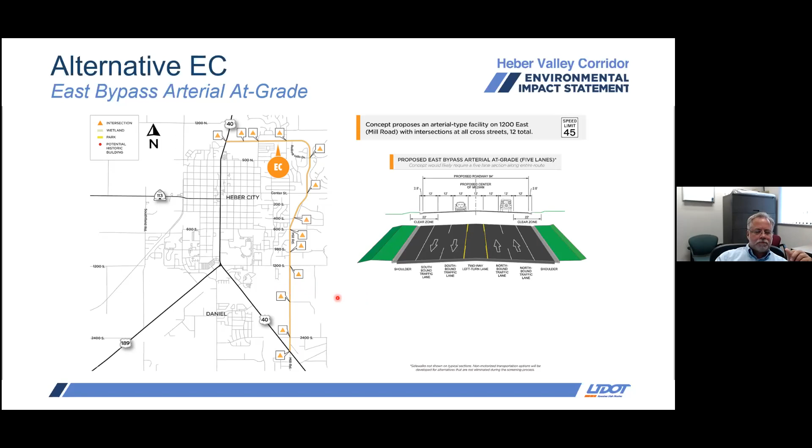It requires more lanes than the previous two alternatives because this alternative carries both the local traffic as well as the through traffic, which in the other two alternatives were split. So with that, that does get us through all the east alternatives.

The last alternative to look at is our transit alternative. Just by way of background, a transit study was prepared in 2020 to develop a vision and an implementation plan for public transportation in the Wasatch County area, to address many of the unmet needs there.

Some of the recommendations from that study: first, provide local service within the Heber Valley. Another recommendation was to create a commuter route between Park City and Heber. Another alternative was to create a commuter route between Wasatch County and Utah County. And then there was a recommendation to create van pool services from Heber City to Orem and to Park City.

Our transit alternative concepts are based on these recommendations. So with that, that does get us through all the alternatives we are currently considering with the EIS study. Hopefully that was informative, I'm sure you have a lot of comments.

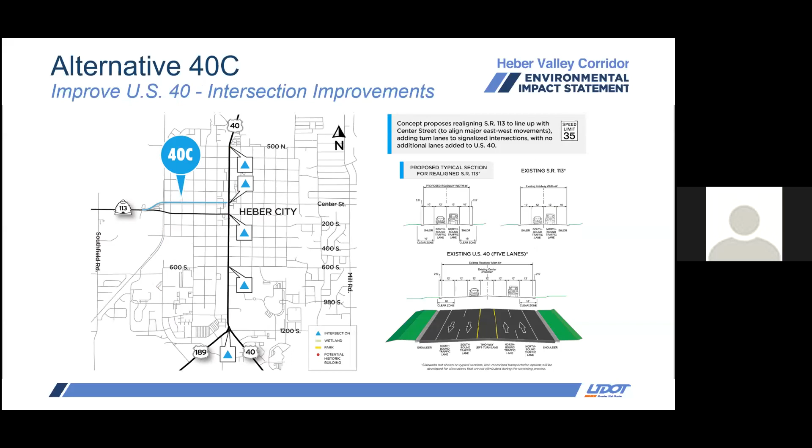So the initial cost estimates I saw were at least $400 million. Is that not accurate? Honestly, we don't know. I'm not sure how those costs were evaluated. Let me go back to trying to scroll back here. Well, I think that would be a really important aspect of the EIS. If we're talking $400 million for a Western bypass and an Eastern bypass, I think these are numbers we should be aware of. Absolutely.

Wouldn't you? Yeah. And then the next question I had was, what is actually the no-build minute delay from like 700 North to 1200 South of Heber Main Street? If I remember looking at your data, it was maybe 8 to 10 minutes for a no-build delay. Is that correct?

I'm going to kind of punt that question over to Charles, our traffic manager, to answer that a little more directly. I do want to circle back on Justin's previous question about costs. We will have developed cost estimates once we get into the detailed alternative analysis.

Well, you see my concern here. I mean, if it's $100 million per minute delay, that's just absurd. Wouldn't you agree? I mean, if it's an 8-minute delay from 700 North to 1200 South, and we build an $800 million bypass, it makes zero sense for the taxpayers.

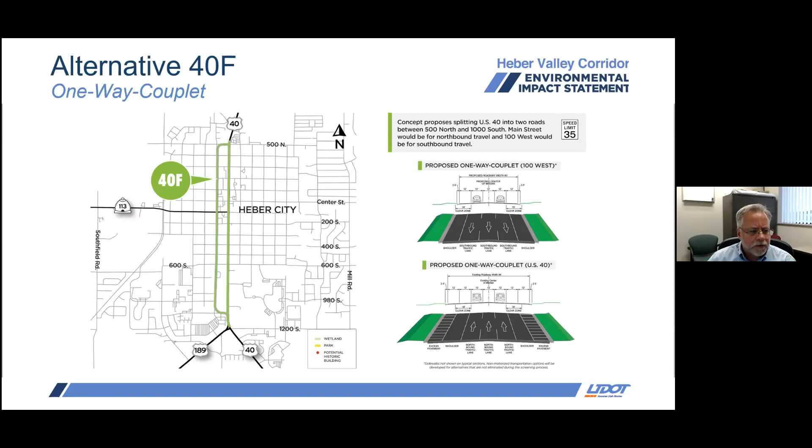So I'm trying to get to the right screen here, bear with me a minute. So with each of these alternatives that we're proposing for the west bypass, let me make sure I'm understanding your question right. We have two options that go with those. One of them would keep US 189 in its current configuration. The second option would realign US 189 onto the bypass. So we're looking at both of those different options.

Okay, that's fine, the westbound alternatives are fine. But if you go to eastbound, you'll notice that all the eastbound alternatives are coming off of 40, and we're not addressing traffic coming north on 189 with all of the eastbound bypass. Yeah, yeah, and Craig, you could answer that. Yeah, go ahead, Vince. Yeah, I understand his question now, but go ahead. Vince, so yes, you're correct. And that's part of what we'll be looking at in the screening process, is how well either the west, east, or middle US 40 alternatives meet the purpose and need criteria.

So those are things that will be considered when we do the travel demand modeling and how it impacts traffic, and what traffic uses a route. So those are things that we'll be considering.

Okay, thank you so much. Those were my questions. You've given me answers.

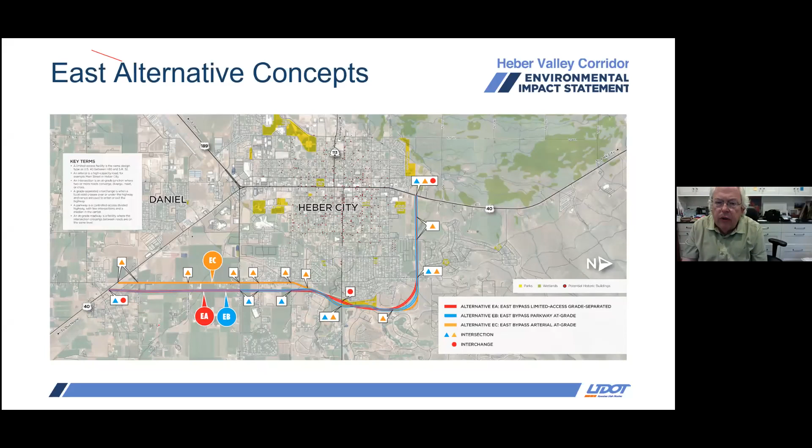One is, how did the Western routes arise? It was my understanding that for many years, a route that was meant to bypass Heber City and would begin just north of 500 north in Heber, the options A, B, and C, that those were being planned. And then now suddenly we have D. How did D come about? Who was pushing that? Where did it come from? That's my first question, because all of these, I'm assuming, the ones that were planned for a long time, governmental agencies may have been acquiring land for those, right?

Right, so that to enable that bypass. But D is brand new. It would require acquiring a lot of land through the North Fields. And that brings me to my second question. You're aware that the North Fields has received a lot of attention, including a referendum, to protect it. What types of considerations, environmental and otherwise, would you give for running a highway right through the North Fields?

I'll attempt to answer your first question, Trudy, and then maybe I'll turn the second question over to Naomi or Vince or Andrea to answer.

To your first question, part of our public process last spring was to ask the public if there were any other alternatives that we needed to consider as part of our alternative analysis. The WD alternative did come forward as one of those alternatives from the public, and so we felt like it was important to incorporate that in and consider it right along with the other alternatives that we're considering here. So it came from a member of the public.

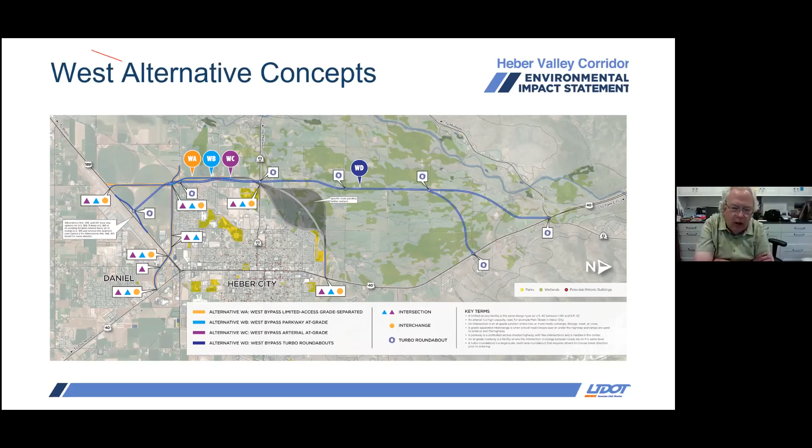Does that answer your question? I have lots of questions. We could go on, but I want to give other people a chance to ask. Thank you very much for your answers. I appreciate it. Thanks, Trudy, for your patience. If we have time, we can circle back to you.

On the written side of things, I want to throw out a second comment related to the one I read earlier about East A being a fast option. Western D might be the best fit given a different circumstance, but others seem short-sighted. That's a verbatim comment as well.

We did have a question come in on the chat, I'm just going to read it out: Is it possible to do concept pictures of what a bridge or tunnel would look like on Highway 40, so the public can actually picture what Main Street and downtown would look like with both alternatives? The slide doesn't show a visual of what the option might entail.

Yeah, that's a good question. Maybe Andrea, you can chime in on this, but it seems like we've done these kinds of visualizations in the past. Yeah, I'd be happy to.

As I mentioned in the last answer to a question Trudy raised, for the alternatives that pass through the screening process, there may be a handful that we look at in detail. Visual impacts is something we will be considering for those alternatives that pass through screening. So if by chance a bridge concept is one of those, we would certainly develop a visual simulation to show what it would look like. If it doesn't make it through the screening process, we will not do a visual rendering because it will be eliminated before we look at it in detail.

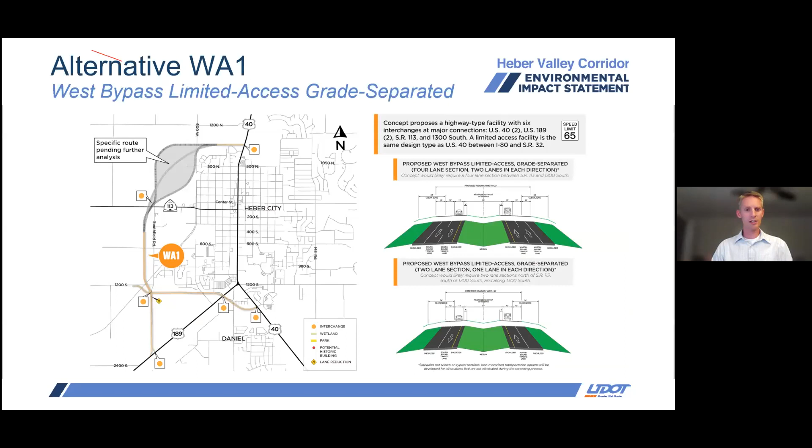It sounds like the question is, we have some alternatives where there's an option to realign a portion of US 189 as shown on this diagram, and what sort of benefits we're seeing. First of all, the analysis so far is very preliminary, but results we've looked at and from previous studies suggest that creating a realignment like this may pull additional traffic off of Main Street, providing additional relief to congestion. How much exactly that is, is something we're going to take a closer look at as the study moves on, and see if it's enough of a difference from other alternatives that it provides a significant benefit to Main Street.

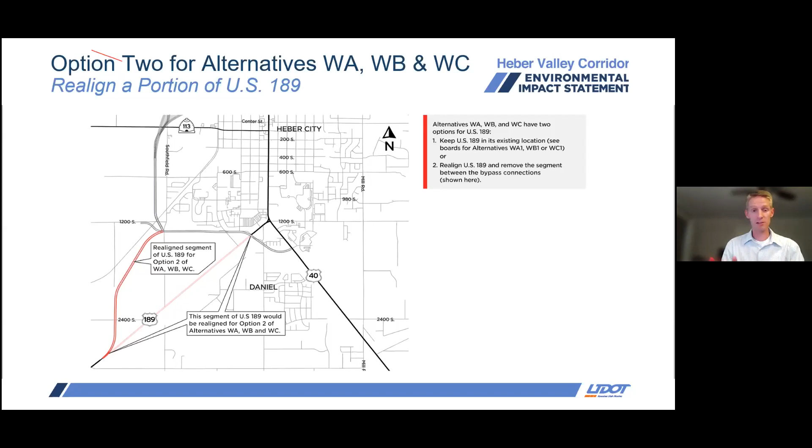Yeah, so I think when you mean west or east, I'm guessing you mean either coming from 189 or coming from US 40 from the Daniels Canyon area. The answer is, when we're talking about through traffic on Main Street, there is more total traffic coming from 189, but there's more trucks that come from 40. So those overall patterns are something we are definitely going to be looking at, seeing how effective the west bypasses versus the east bypasses are at relieving congestion on Main Street.

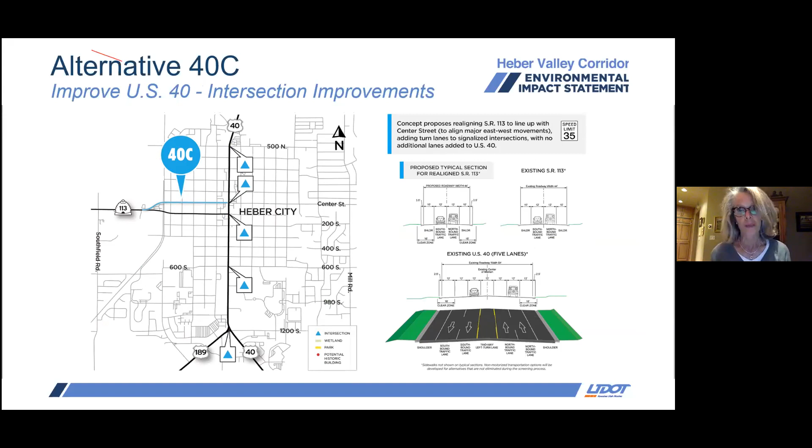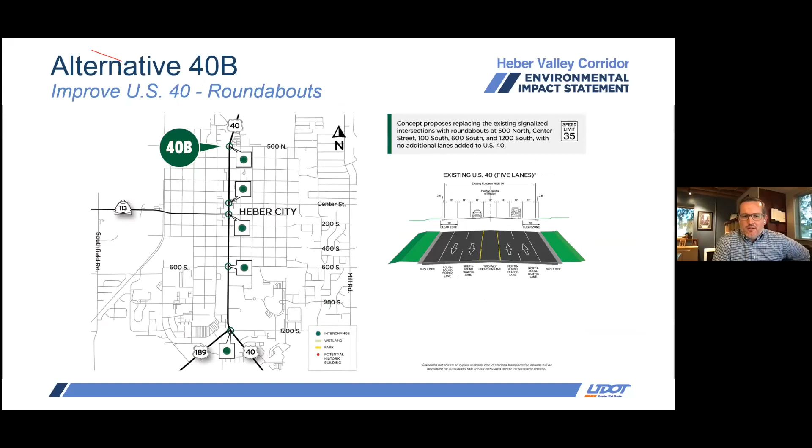But thanks, Sue Ellen, we appreciate your comment. Make sure we capture that in a formal comment. Anyone have a response they'd like to make? No, I would just add to that, Justin. That's a great comment, Sue Ellen, please send those comments to us so we can capture them. I will, and I just have one last thing.

I was kind of curious - you said WD came from a member of the public. Were there numerous members of the public with that idea of starting the bypass at River Road, or was it just one person? I know I made a lot of comments and suggestions that haven't entered into any of these proposals, but maybe there were several people proposing the WD idea, or was it just one?

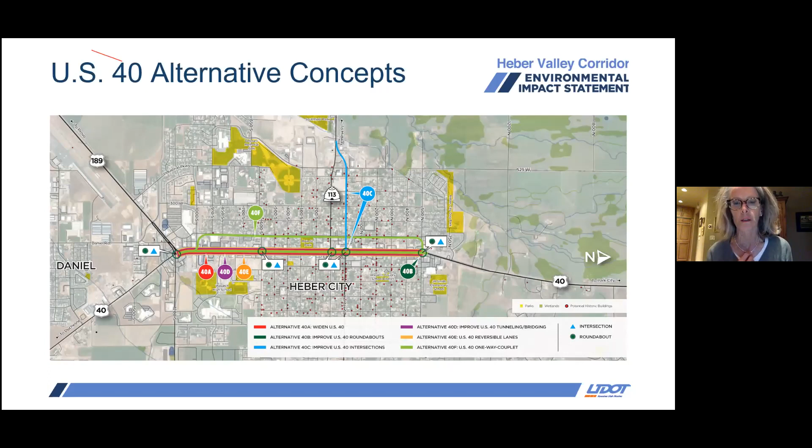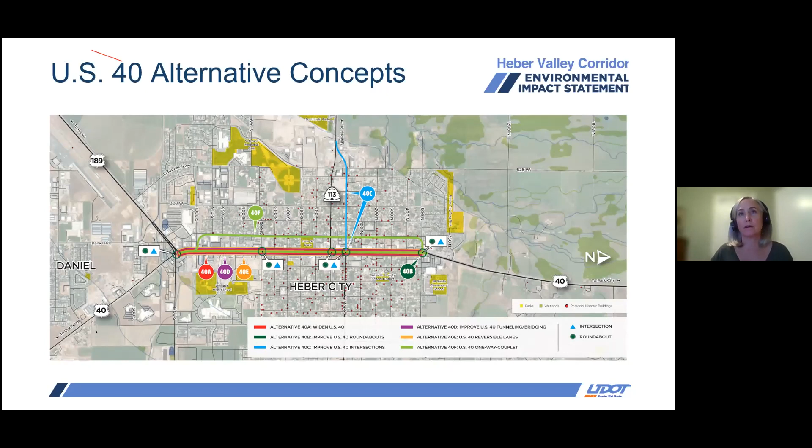I don't know, maybe Andrew you can speak to that. I know it came as one fully developed alternative. I'm not sure how many people, if it was one person representing a group. But it was a fully developed alternative that came forward. And I'll add to that - it was a fully developed alternative, and there were a few people who commented that they were in support of this alternative as well.

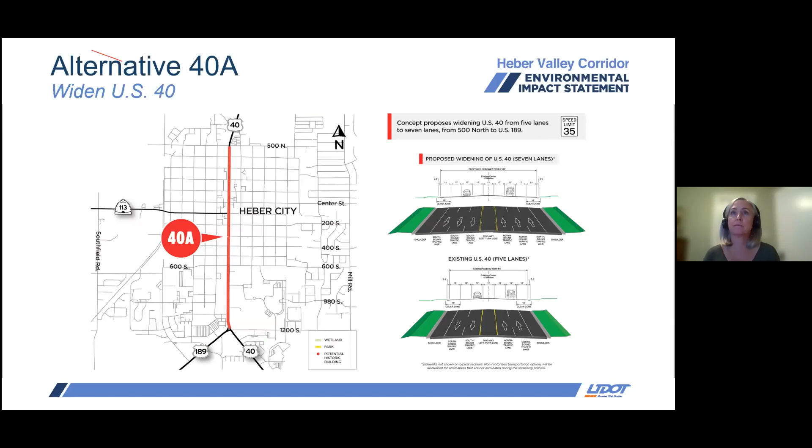And then Sue Ellen, to your comment that you submitted some ideas on alternatives you aren't seeing here today - we did try to get all of the alternative suggestions from the public into these concepts. But if you feel we've missed something, whether you commented before or not, we would like to hear about ideas we could add to our toolbox, to make sure before we go into the screening process that we've got all the reasonable alternatives to begin with. So apologies if we missed something you submitted before, please submit it again.

Okay, so we're going to go back over to the written comments or written questions. We received a question from Brady Flagare. He says, is there anywhere else similar to Heber Valley where turbo roundabouts are used? I like the concept, but they seem impractical for towing trucks in this climate, with snow.

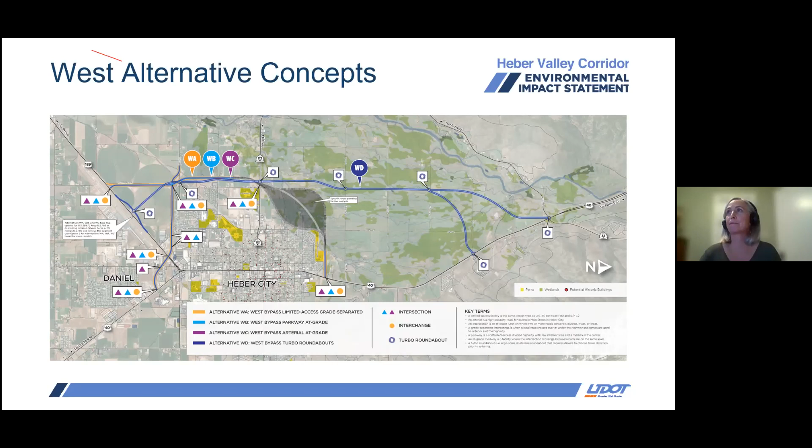I believe we do have some links to a website that FHWA has produced, and also another website from the creator of this one as well. Can we post those links on our website, Andrea, so people can see that? We're not aware of any turbo roundabouts locally or in the Utah area, but I thought these links did a nice job explaining what turbo roundabouts are and where they're being used. I think they're used a lot in Europe, but I'm not sure if there's any being used anywhere else in the U.S.

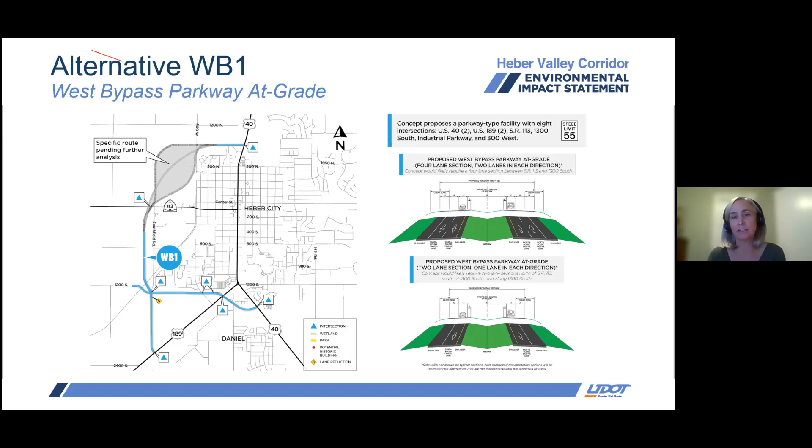This is Andrea, I can add just a little bit. I think different people have different definitions of what a parkway is, and I don't know that there's one right answer to that. But it is a good comment on the number of intersections -- that's something we'll be looking at through traffic analysis. I did want to call out that WC is an arterial at grade. It has a different cross section, but we have an alternative that's pretty close to WB, slightly different without the median and with I believe just one more intersection. Bob, I just wanted to clarify, you said D as in dog, correct?

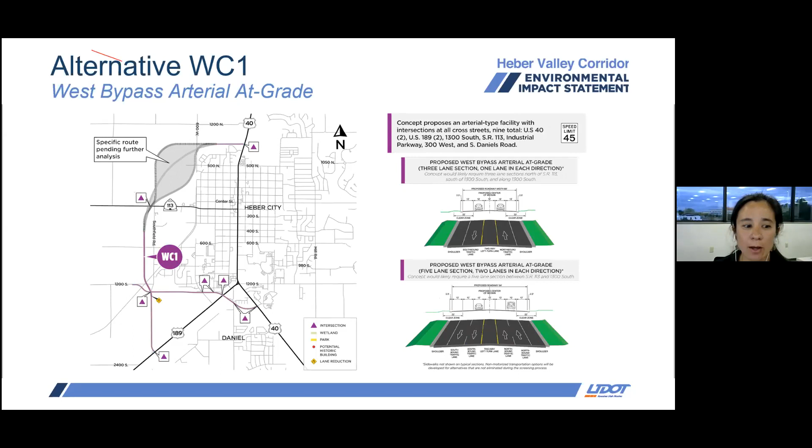So you were talking about the turbo roundabout alternative -- D as in dog is a true parkway based on your key terms. I compared the key terms with WB as in boy, and really it's not a parkway, it's more like a bypass arterial, more like a main street, because you've got all the intersections coming across it. It's not a biggie, I mean, it's just something that if you change the terminology, you won't look at it as a high-speed parkway -- you'll look at it as a slow-speed main street.

I just want to clarify, Bob, the speed we have on the WD alternative is also a 55 mile an hour speed limit as we show it here, and it does have a number of at-grade intersections where those turbo roundabouts are being utilized. And then if we go back to the WB alternative, it similarly has a similar speed of 55 mile an hour, and I think it has a similar number of intersections as well. So I think we're fairly consistent there, but we'll definitely take a look at it and make sure we are consistent in that terminology.

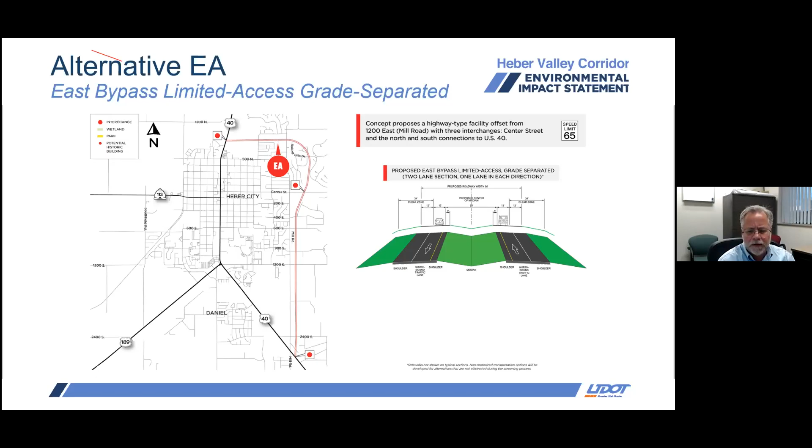There would be connections at the interchanges at 3 locations: one at US 40, one up at Center Street, and another on the north end of US 40. So the local road network would not have direct access to this alternative; rather it would bypass those local roads. Traffic would be coming off of Highway 40 closer to Daniels Canyon, but it wouldn't have any of the traffic from 189. Is that right? Yes, as we're showing it here, that's correct.

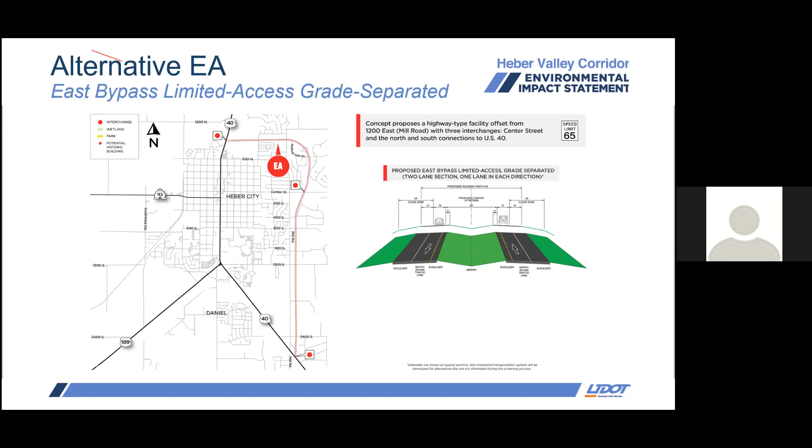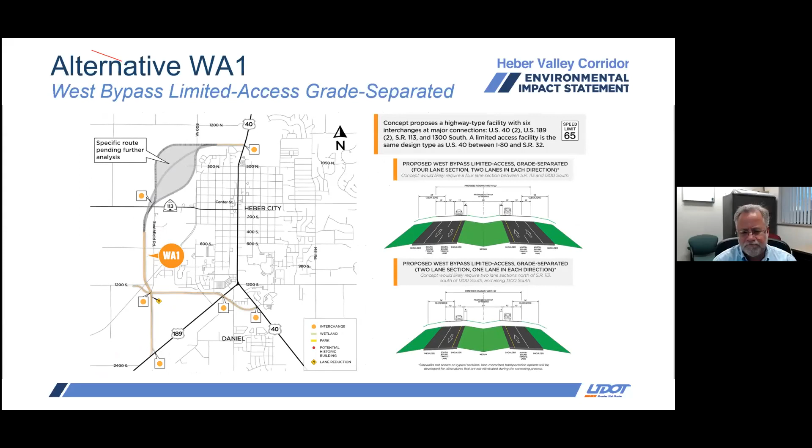Okay, and then with the westbound—is it the same kind of thing, I think it was westbound A or W, or 40A? That one is the 65 mile an hour option. Is it the same idea where it would either go above, over intersections, or under? Yes. Very similar idea.

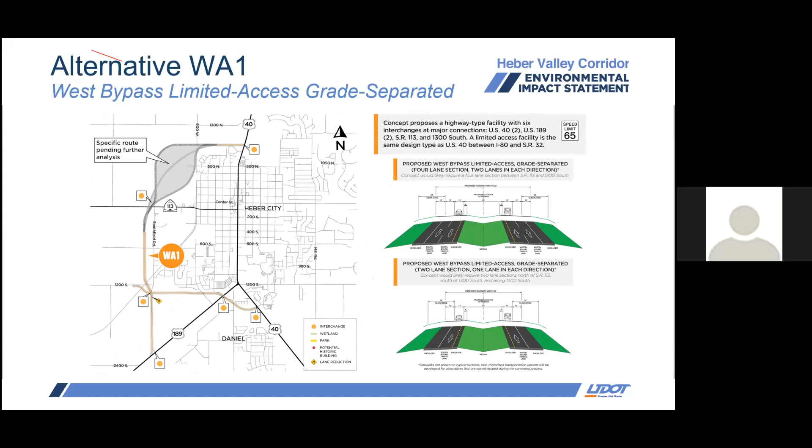And with this process, I saw on your timeline there's going to be a further ability for public comment when you get further in, I think in the summer of 2022. Does that mean changes could be made then when you narrow things down more? Would we be able to have even more of a say in what happens?

Maybe I'll turn that over to Naomi to discuss the public process as we move further into this. Sure—after this, we'll go back to work essentially further developing the alternatives, following that screening process with the kind of funnel diagram. Those alternatives that make it through level 1 screening, meaning they meet the purpose and need of the project, and also make it through level 2 screening for critical resources, we will analyze in detail, and the draft EIS will show the results of that analysis.

In that draft EIS, we will also identify our preferred alternative. The public will have an opportunity to comment on the draft EIS in general, our analysis, and the preferred alternative or anything else contained in that document. It will include a summary of all activities done, the alternatives that were dismissed and why, and the detailed analysis of the ones carried forward. Does that answer your question?

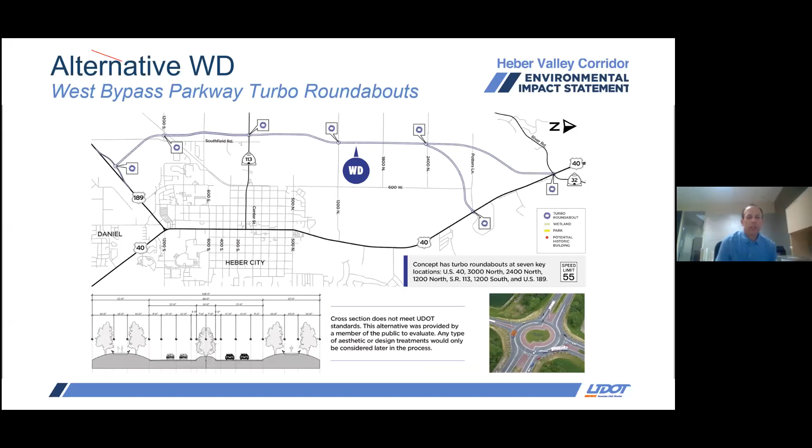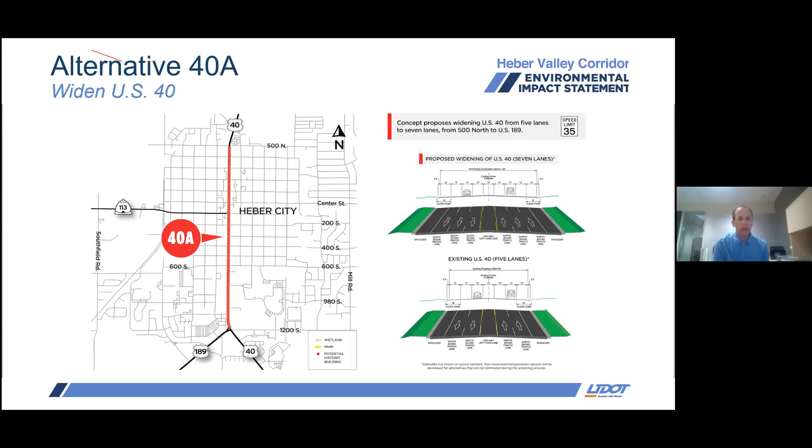Get back to that. I can answer that, Craig, if you want. Yeah, why don't you go ahead and fill that one, Vince. Thanks. I think right now at this phase, we're just looking at whether the tunnel concept works in alleviating traffic, and is it a viable or reasonable alternative. If it does pass screening, the next part would be to look exactly where we would place the alternative. We put it on Main Street - it's just the best place right now, but we could look at options to maybe put the tunnel in a slightly different location. Since it's underground, the construction impacts are very minimal. They construct subway tunnels all over the world, under buildings, under streets, that are fully operational, and there's no impact. So I don't know that we're concerned about that. It's just to see if the alternative works. And that was the place just to put the alignment - we could look at different locations.

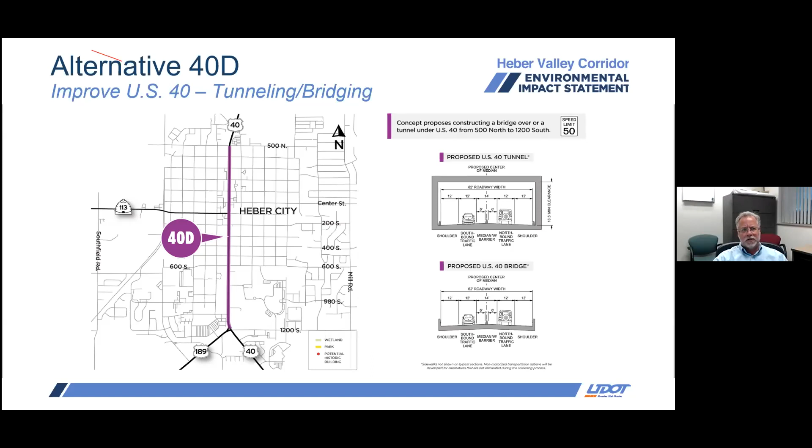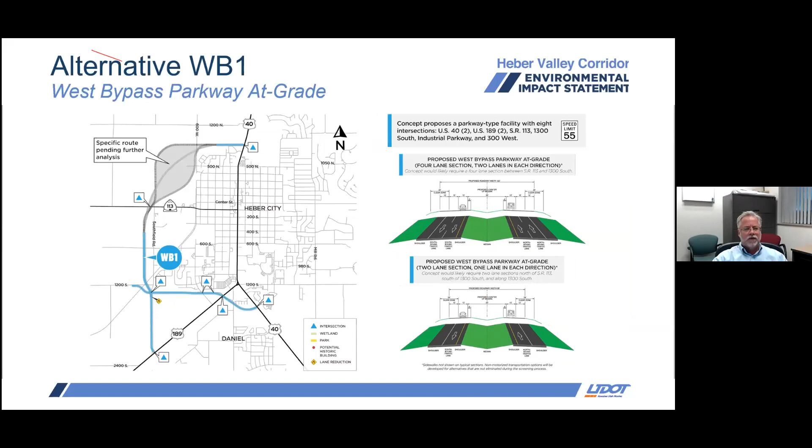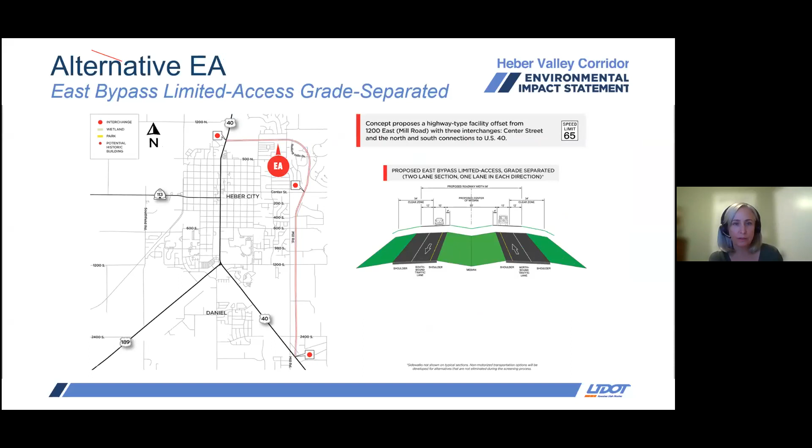So if you want to scroll to one of the slides that shows the scroll plots, I think any of those would work. That one, yep, that's helpful. It's hard to tell on this screen, but if you went to the website and the alternatives tab, you could go to a section that shows the scroll plots. If you clicked on any one of those—US 40, West Alternative, or East Alternative—you could zoom in and look at it in more detail.

The red dots shown on that scroll plot are hard to see on this screen, but they're there, and they represent preliminarily what we've identified as potential historic buildings. You can zoom in there and get an idea of how many we think there are at this point. But I want to put in the caveat that it's preliminary information we have from available databases, like the State Historic Preservation Office, that we've acquired and are showing here.

So we'll use this data for screening, and after we go through the screening process, we'll go to more effort to identify which buildings meet the criteria for eligibility on the National Register of Historic Places. So these dots signify a starting point. We still have more work to do, which we'll do after the screening process when we narrow down the alternatives a little bit more.

Yeah, it would be interesting to see how many hundreds of millions of dollars we have to pay for two blocks, essentially, of historic Main Street.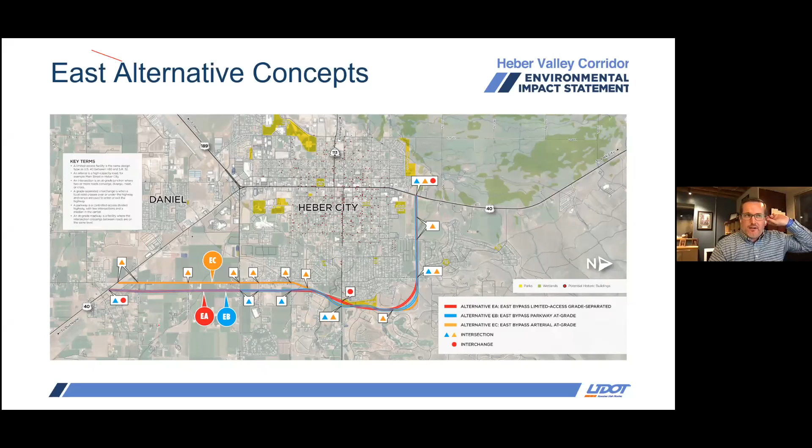We have one more question submitted by Brian Fletcher. He asked earlier about the tunnel, and in response said: Thank you, I see the tunnel as a win-win. There is minimal impact on traffic during construction, no neighborhood disruptions, few to no intersections needed, reduces noise pollution in the valley, can reduce air pollution through air filtration in the tunnel, and increases safety for pedestrians and bikers on existing roads. So just a follow-up statement to the answer received. Thanks, Brian.

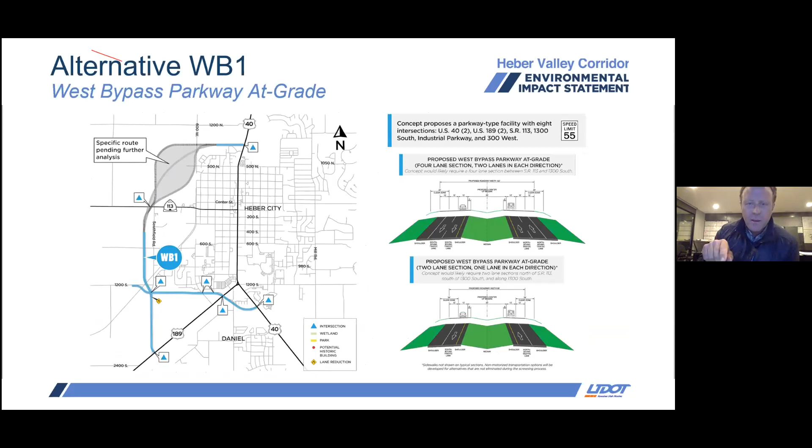I have a question on the western bypass. You may have covered this, I apologize, I haven't been on the whole night, but there's the one that starts up at the intersection north of town, the WD alternative. Why is there two?

Are the two options the one that comes off of Potter Lane and then also the one that comes out of River Road? Is it one or the other, or is that both? No, this alternative has both of those connections being made. So it's not one or the other. This alternative would go with both of those connections, the one at Potter Lane and the one at River Road. Is there some reasoning as to why you'd have two funneling to the same route?

This was an alternative that we received from a member of the public. We haven't really evaluated it based on the traffic. If this one passes through some of that screening, we'll take a look at it and see, at least from a traffic perspective, whether or not both connections are needed or just one. So at this point, we haven't really evaluated it from a traffic perspective.

And is the turbo roundabout only offered in this route? Is this something that also came from whoever the person was from the public that brought this up? Yes, it came specifically as part of that alternative. Have they been used anywhere else in Utah? I'm not aware of them being used anywhere else in Utah.

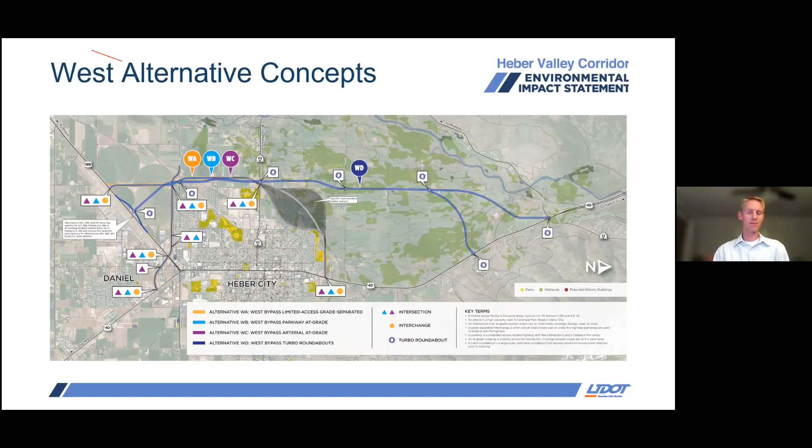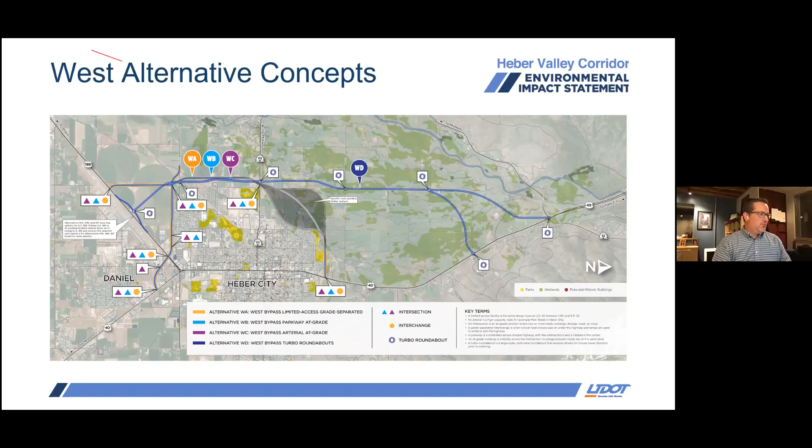Do you mind if I ask one more question? Is anyone else waiting? Not at the moment. Please continue. On the eastern side, is part of the study looking at the positive benefit of that side alleviating so much of the growth that right now is funneled to Center Street and 12th South?

I mean, we have the bypass option obviously for traffic coming through the valley, but does the study also take into account the traffic that's coming from the east side, from Timber Lakes, from Lake Creek Farms? Is all that weighed into that?

I mean, clearly that's part of the traffic, or is the bypass just considering the tankers and the traffic that's coming from either North 40 or Highway 40? I guess Highway 189 doesn't really impact much, but...

So the eastern bypass does consider both the through traffic and the local traffic in these alternatives. Charles, I don't know if there's more you'd want to add to that, but it does look at all the traffic in that area.

Yeah, the way these alternatives are defined right now is they're open to any vehicle that wants to drive on them. And in our traffic modeling, we're taking into account the travel patterns for the entire valley, so we're investigating how much they would be used by any type of trip within the valley. So it could be assumed that there's kind of a double bonus to the east side scenario.

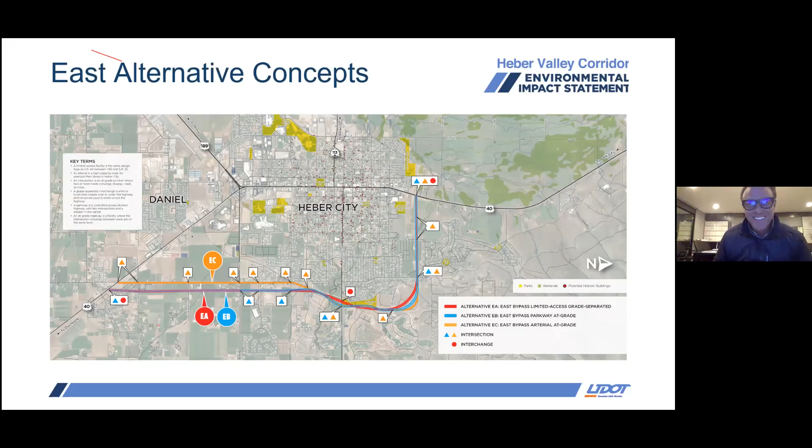Maybe while we've got a minute, I'll throw the opportunity open to our project team, our study team. Any additional clarifications, comments, anything that I've missed in moderating that we want to remind folks of? I see Andrea came off mute, maybe chime in.

I do have one. I've heard a couple of comments about people saying, well, when's a bypass going to be, how long is it going to take? I just want to remind everybody that we don't know that it will be a bypass at this point. We're looking at alternatives that could be a bypass, or alternatives that could improve US 40, but we really don't know at this point. I just wanted to make that comment.

Good reminder, thanks Andrea. Geoff, you see you came off mute also.

Just want to remind those in attendance, and those who may be listening to this or watching this after the fact, that this will be posted online - the entire meeting, as well as the presentation itself. So if you miss something, you'll have plenty of time to go back and review. We want to make sure everybody has as much opportunity as they can to take advantage of the information provided tonight, that'll be provided tomorrow, as well as throughout the comment period. Once this is posted, we'll keep it up throughout that comment period, and most likely throughout the project until we get to the point where we move into the draft environmental phase, when we get back out to the public as we go through this refining process.

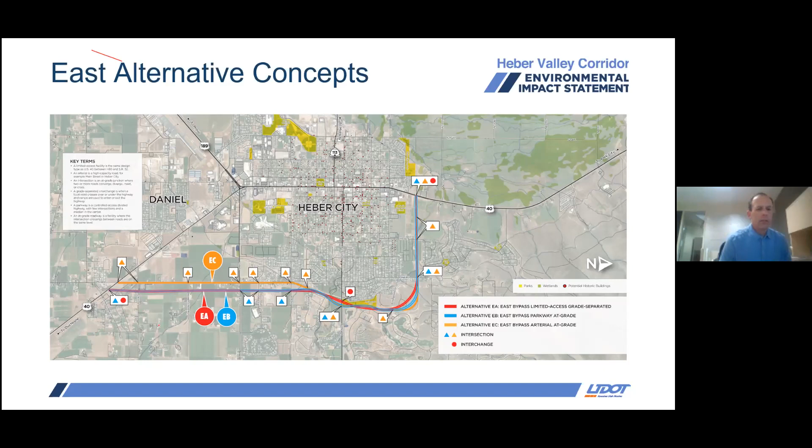I want to add that the project to make an improvement on 40 has been in the long range plans, and there's an identified need in those plans that something should be done. So it's been in the planning process for a while that there's a need. The community came out and said, we know there's a need to do this, can you guys go ahead and start that process? So it wasn't just that the community came out and said, we think there's a problem here, fix it. It was identified in the long range plans as having a problem. The community just said, could you go ahead and bring that up on the list to start that evaluation process?

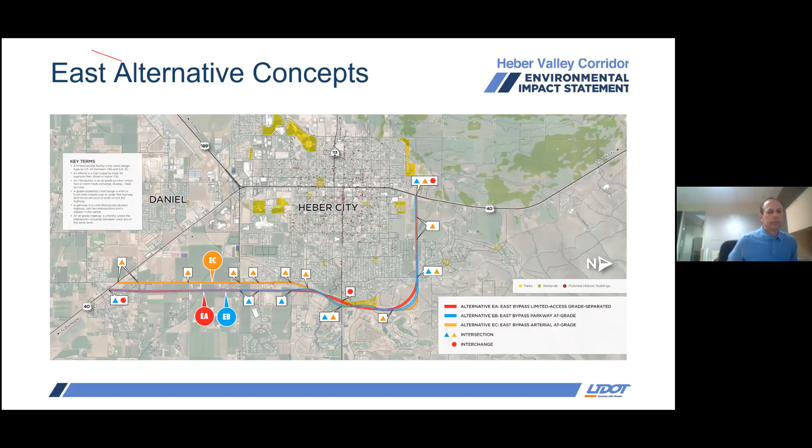And those conversations, to what Vince was saying, have been ongoing for years, which allowed it to get onto their plans, and it's just taken time to go through those other incremental steps to get to this point.

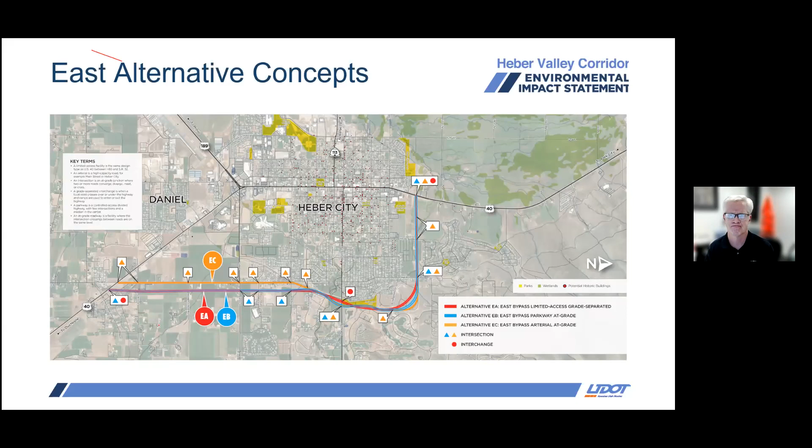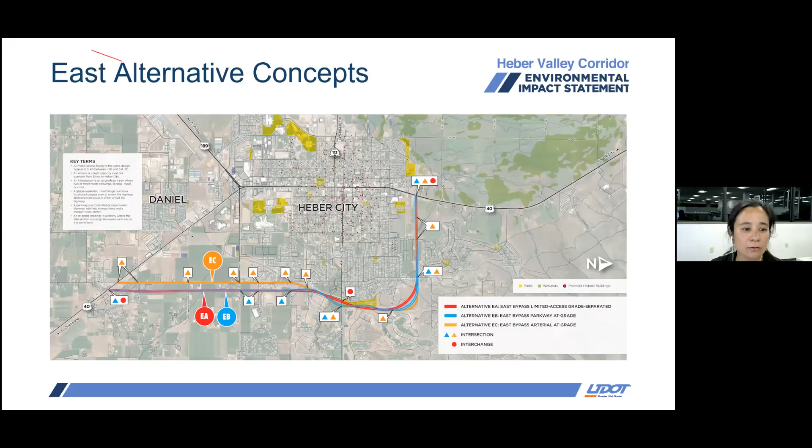Thank you very much. Naomi, did you have something you wanted to add? And then we have a question coming online. I think it was covered, so thank you. Okay, thanks Sue Ellen. The question from Denise Gwen - do you know where the biggest population growth is predicted? Midway growth, Heber growth? This may also help determine which bypass would be more useful.

I think we do have some of the growth numbers that we look at. I don't know if they're granular enough to know which side of the valley that growth is coming from, or when. But we obviously do look at growth as part of our analysis.

I'll just add on to that, Craig, that in the travel modeling we look at new developments that are proposed between now and 2050. So we do take into account where that growth is expected and how it would affect each of the different alternatives. For example, we know there's going to be a lot of growth north of Heber on the east side of 40 - there's a big development, and that's included in our model. So we do account for the future growth in the modeling that we do.

Charles, I also saw you come off mute, would you like to weigh in also? Vince said it very well, I don't have anything more to add.

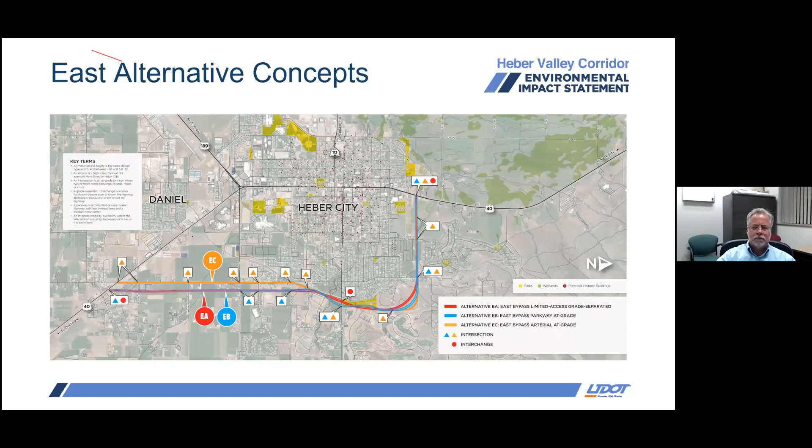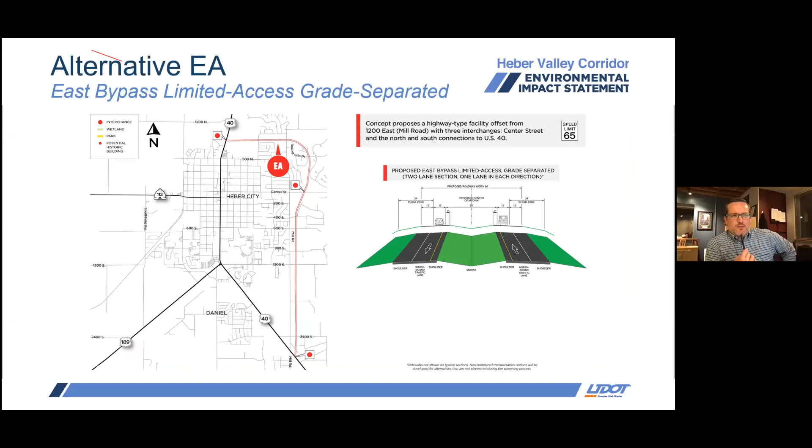I know that folks in the transportation space can get used to how these things unfold, and I know from the public side it can be less familiar. So I was just going to walk through this one more time, but we had a new question come in via Facebook. From Heidi Ward Harmon: do the east side routes include roads that Red Ledges is already obligated to pay for? If so, it would save the taxpayers a lot of money.

That's a good question. I'm not sure who might have the best answer to that on the team. Not exactly knowing where the roads of Red Ledges are being built, but just to reiterate, the alternatives we are using on the East Bypass do follow to a certain degree this East Bypass road that is currently being built, for much of this alignment. It does deviate a little bit in this one section where it curves around and heads back to 40, but much of this may already be built once we actually get a project funded, if one of these alternatives were to be selected.

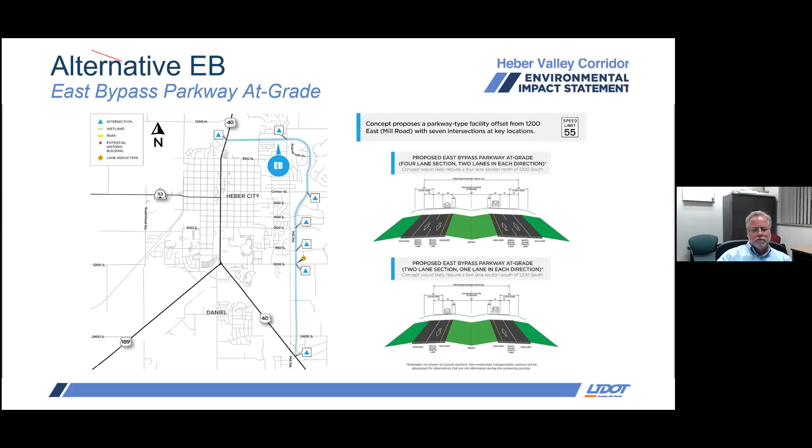Thanks, Craig. Anyone else on the team want to weigh in on that? Okay.

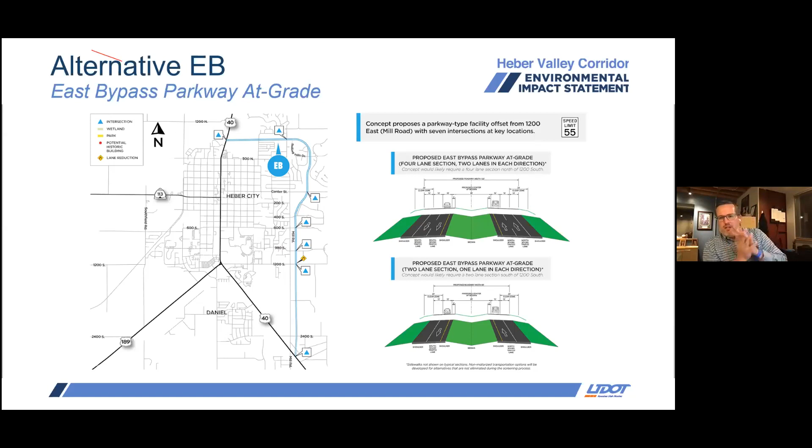That public process led us to now, and the alternatives are in front of the public. Now we need to hear from you — did we miss something? Are there new ideas? Are there adjustments that need to be made? That will help us go through another refining process, that level of screening Andrea has spoken to, that will winnow the alternatives down to a set we can dive into more deeply.

As we do that, we'll start to prepare the draft EIS that will be put out in the summer-fall timeframe next year for an additional round of public review. Those of you who have been with us the whole night know we talked about that a little bit — this is not the only time you have to weigh in on these alternatives. That said, this is an important time for you to weigh in.

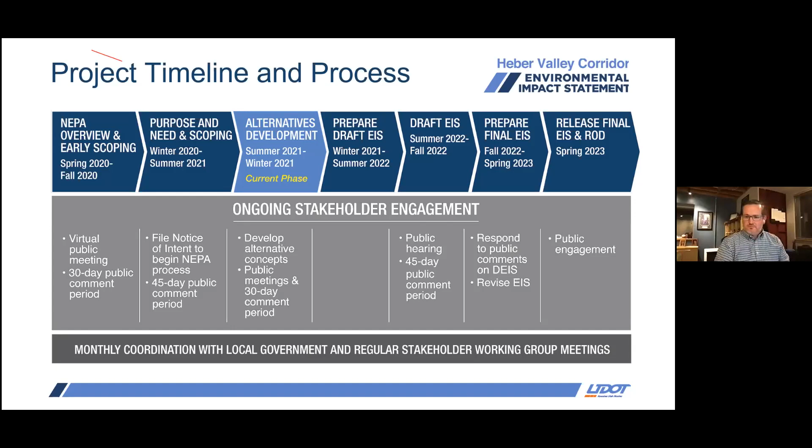I just want to reiterate once again our appreciation for all of you sticking with us tonight and being a part of this process. We know how important this project is to your community, and that's not lost on us. We want to do the right thing. We're committed to following our NEPA process and finding the solution that would best solve the problems we've identified in our purpose statement, and that's the least impactful.